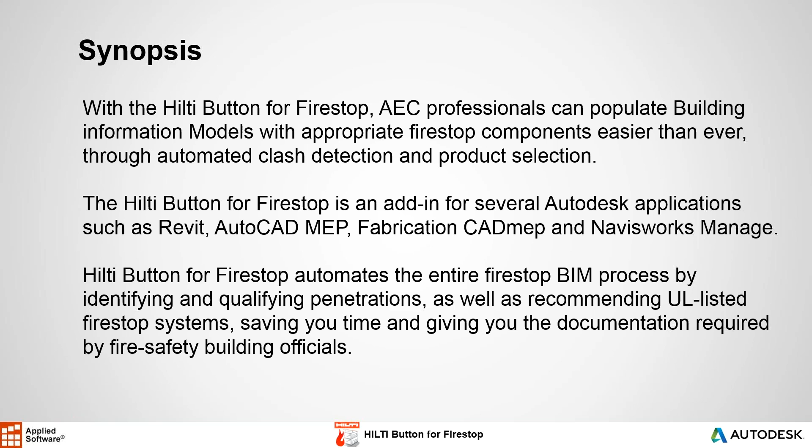The HILTI Button for Firestop automates the entire Firestop BIM process by identifying and qualifying penetrations, as well as recommending UL-listed Firestop systems, saving you time and giving you the documentation required by fire safety building officials.

So let's take a look at HILTI as a corporation. HILTI has been around for a long time, since World War II, and as you probably know, HILTI is a company that makes hardware solutions, drills, and what have you. But you probably didn't know that HILTI made Firestop products and also Firestop software for these products.

Before we actually talk about the software applications and how it works, let's make sure we understand the three strategies for fire protection in buildings. There are three primary strategies used to save lives and mitigate damages when a fire occurs: containment, suppression, and detection. With containment, we restrict the movement of smoke and toxic gases and help contain the smoke in the room of origin. With suppression, such as sprinklers, we help extinguish fires until the first responders arrive.

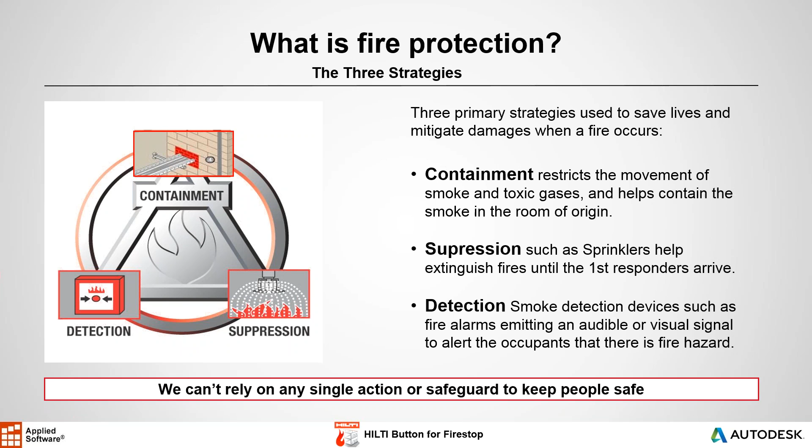With detection, smoke detection devices such as fire alarms emit an audible or visual signal to alert the occupants that there is a fire hazard. So we can't rely on a single action or safeguard to keep people safe. Obviously, containment, which is the first strategy, is better than all the others. Why? Well, Firestop is required by building fire codes and must be included in the design documents and specs. It's kind of a preemptive way to solve the problem.

Firestop is enforced by authorities having jurisdiction, and most field problems can be avoided by proactively including Firestop systems in the design process. So we want to use this as a preemptive way to save lives, assets, time, and money. Since Firestop saves lives and assets, it's a key component in the building value chain.

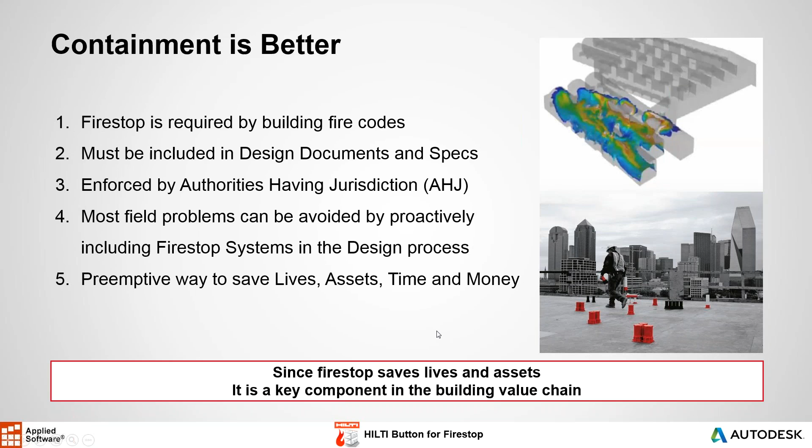So the typical Firestop activities in the field are improvised field discussions. Cast-in devices are used at best, inaccurate estimation process, and requires a manufacturer representative for product selection. So people simply call a HILTI representative or someone else to help them with the process. It's an afterthought, it's not organized, and I think we can do better than that.

So the implications of these activities is that you're spending too much time on details, modeling, or selecting product approvals. Of course, that means that you're wasting time, which is very valuable. And decision making in the field is a time-consuming process. Inaccurate bids result in change orders, inaccurate purchase orders, and there's a high possibility of rework required by the fire marshal.

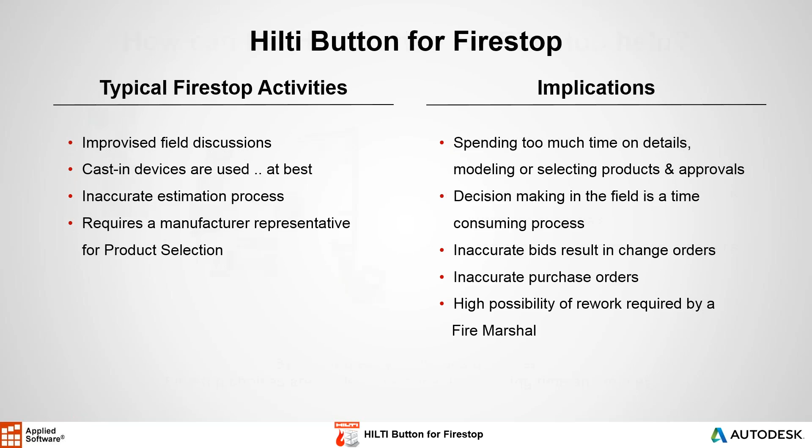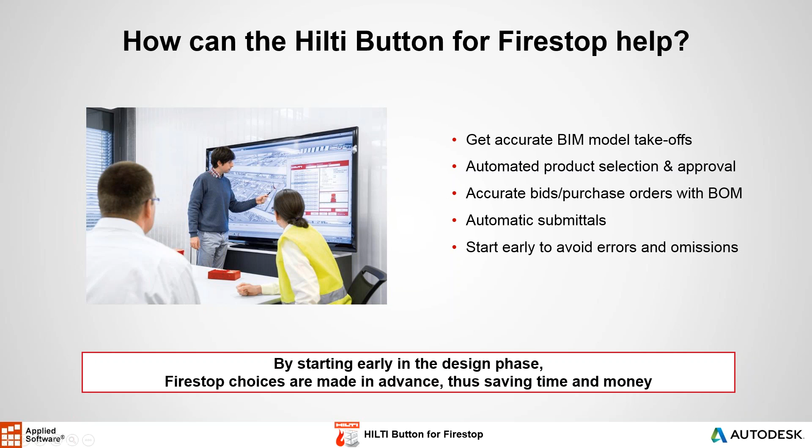So the HILTI Button for Firestop can help. First, by getting accurate BIM model takeoffs, automated product selection and approval, accurate bids and purchase orders with bill of materials, automatic submittals, and start early to avoid errors and omissions. So by starting early in the design phase, Firestop choices are made in advance, thus saving time and money.

Alright, so now we get to the actual application, which is the HILTI Button for Firestop. It's a five-step process. First, identifying and qualifying penetrations in the BIM authoring tool. Step 2, exporting to Navisworks Manage. Step 3, running the clash detection. Step 4, defining the UL systems and products. Step 5 is populating the 3D model with the Firestop BIM components.

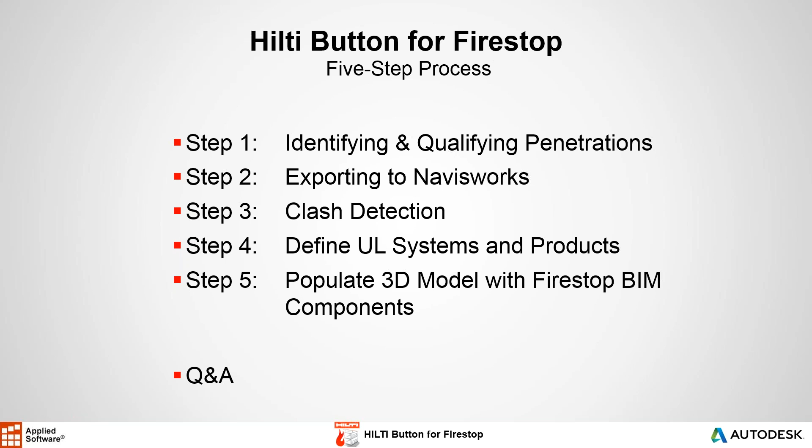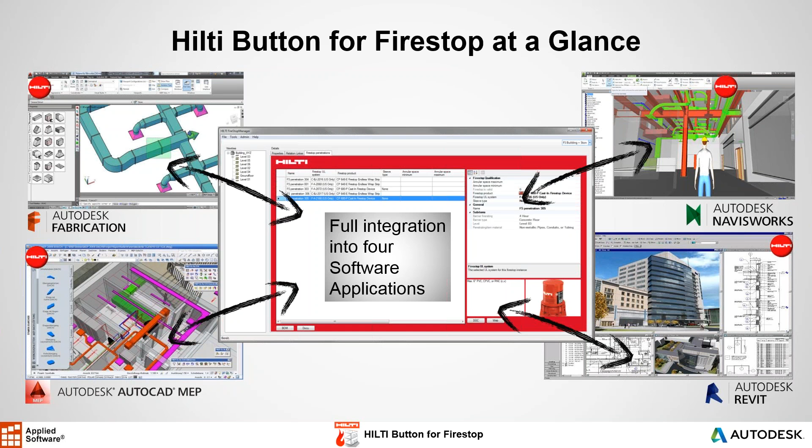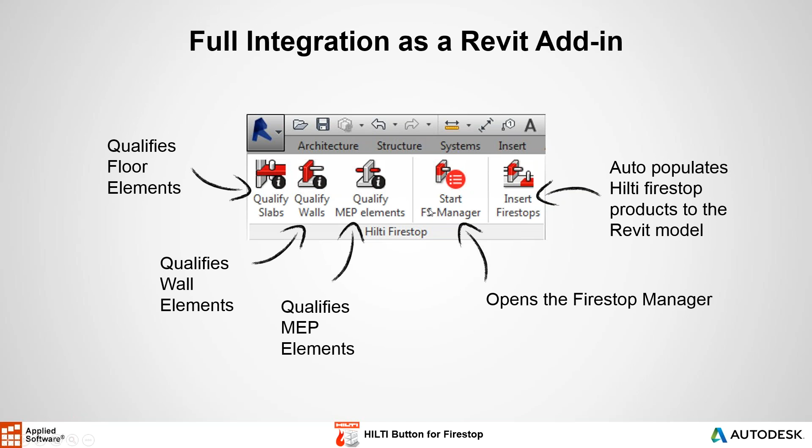At a glance, the HILTI Button for Firestop is involved with 4 software applications, namely Revit, Navisworks Manage, Autodesk Fab MEP, and AutoCAD MEP. So in the application itself, this is in Revit. The add-in is basically in the add-in menu of Revit. It has 5 components in it: qualify slab, qualify walls, MEP elements, start the Firestop Manager, and insert the Firestop. So you're going to see something very similar to that in the AutoCAD platform of products. Same thing, you're going to qualify the Fab MEP, the MEP, and then the rest of the products as well.

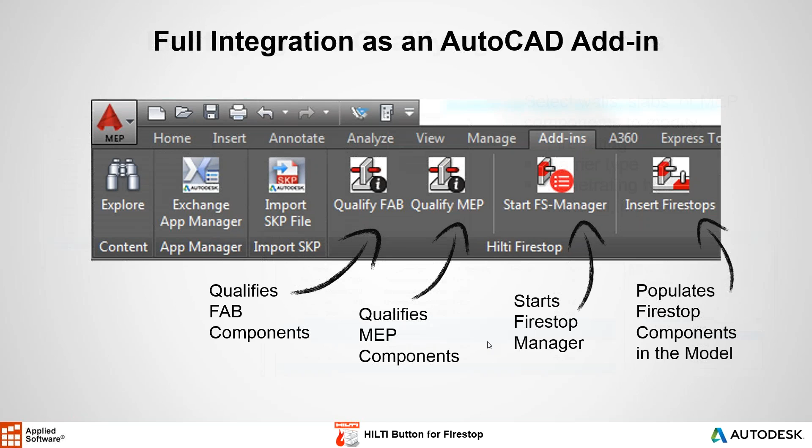So after we qualify, then we move on to make sure that specific components such as walls, slabs, or MEP components have the proper fire rating, the barrier type, penetrating material, and they actually have a material assigned with the insulation, if any. Of course, the fire rating can be 1 hour, 2 hour, 3 hour, and 4 hour, depending on the building itself.

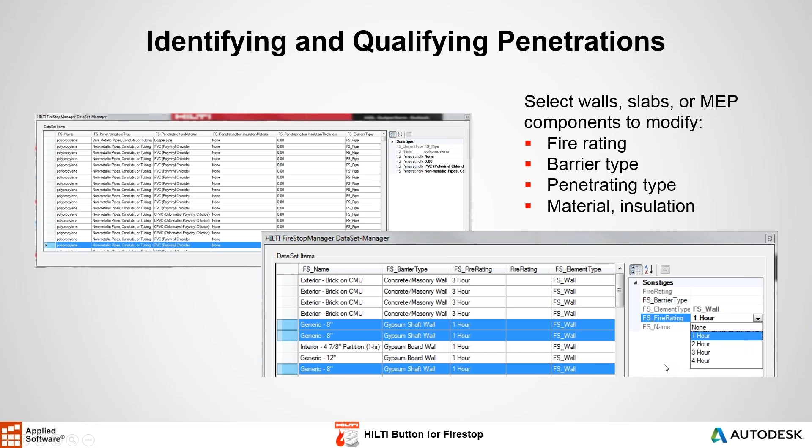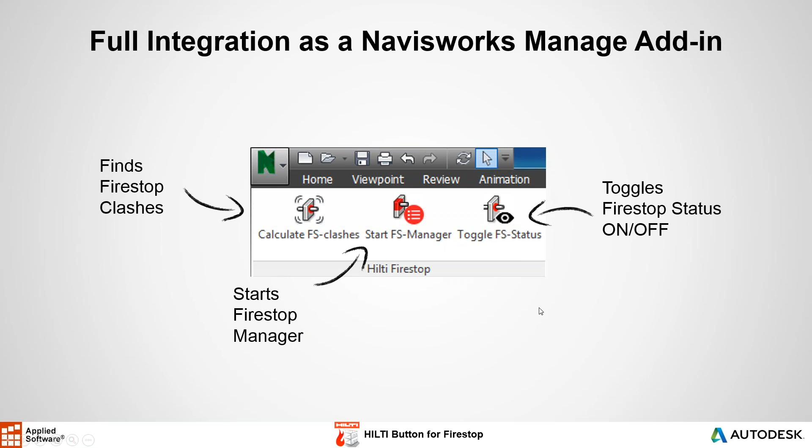In Navisworks, we basically find the Firestop clashes, start the Firestop manager, and toggle the Firestop status on or off. What you are used to in Navisworks in terms of running clash detection, this happens automatically using the Firestop manager. You're not actually going to be creating selection sets or search sets in Navisworks. This is an automated process, so it's completely free of manual intervention. Once you have qualified the elements in the BIM authoring tool, you take it into Navisworks, you run the clashes, and you get your clash results in Navisworks.

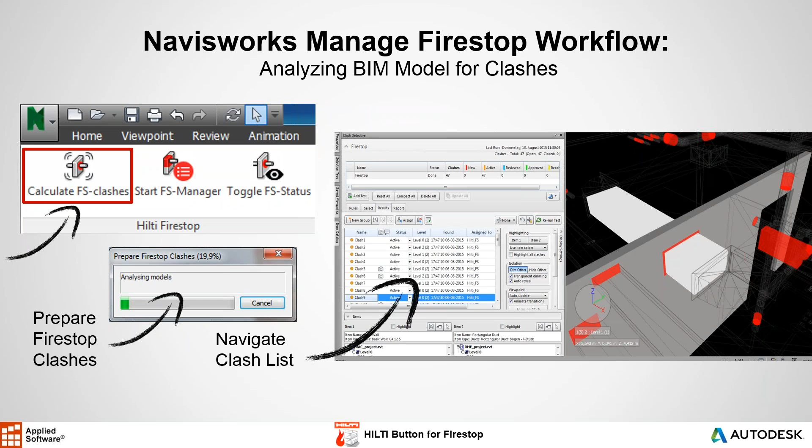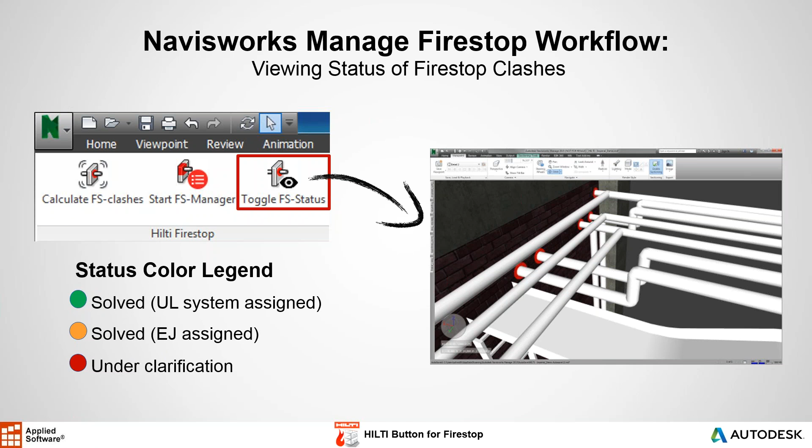The status of the Firestop clashes initially is red, which means it's under clarification. When it's solved, it becomes green, which means a UL system has been assigned to that penetration. If there is a question and you need some professional help with that, then a yellow color is assigned to that penetration.

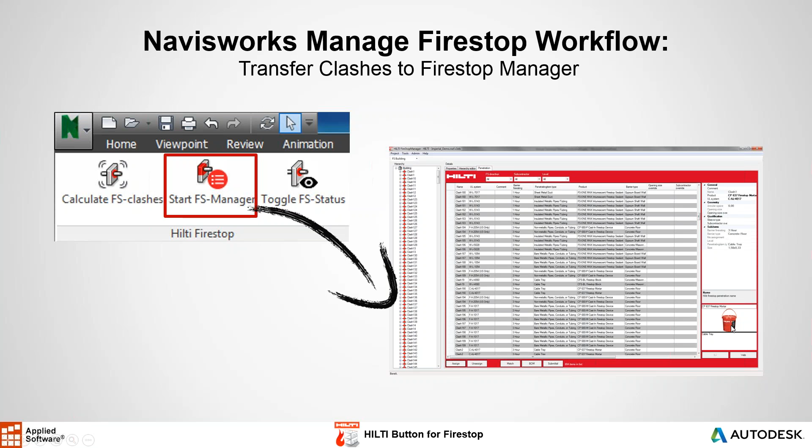So the next step would be to transfer the clashes to the Firestop manager. The Firestop manager opens up for HILTI and lists all the clashes hierarchically, and then you can simply assign those clashes, and you can see the preview of what the product looks like on the bottom right.

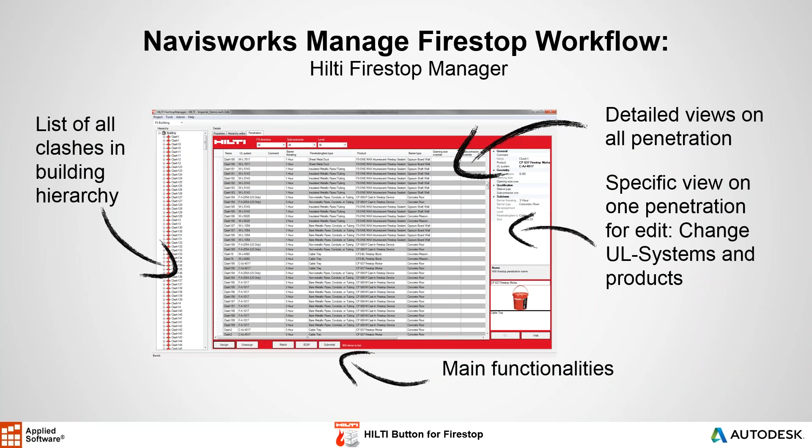Here, this slide shows the different functionalities of the Firestop manager. So at the bottom of the Firestop manager, you have 5 buttons. These are assign, unassign, match, bill of materials, and submittal. The first button, you're assigning UL systems and Firestop products to all the penetrations. The second button, you can unassign what you just assigned in case you need to make some changes. Number 3 is to change the one penetration or match similar penetrations to that specific penetration.

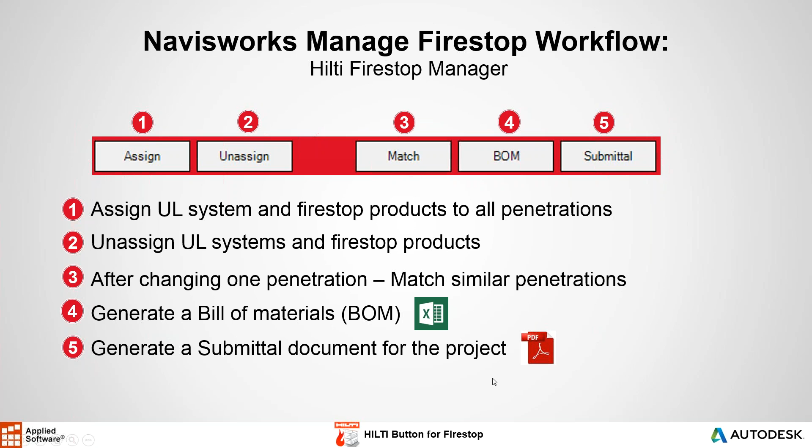Number 4 is you can generate a bill of materials, and then you can export that to Microsoft Excel. The most important part of this, of course, is to get to the submittal document, and this is generated as a PDF automatically using the Firestop button.

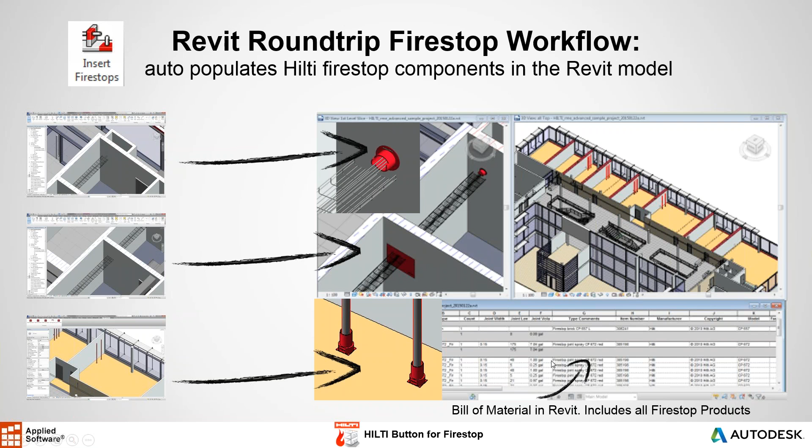So in order for this to work in the best way possible, we want this to be a complete circle. We want to go back to the BIM authoring tool and populate the Firestop components in the BIM authoring tool, which is in this case Revit. These are actual Revit families and can be listed in your Revit schedule. So let's move on now to a live demonstration.

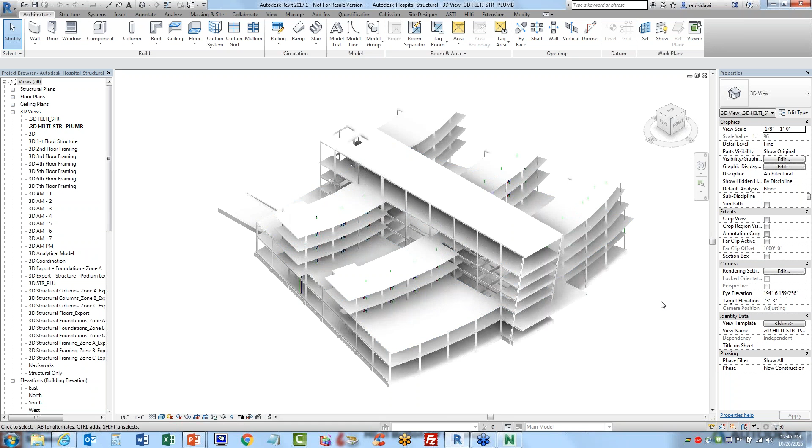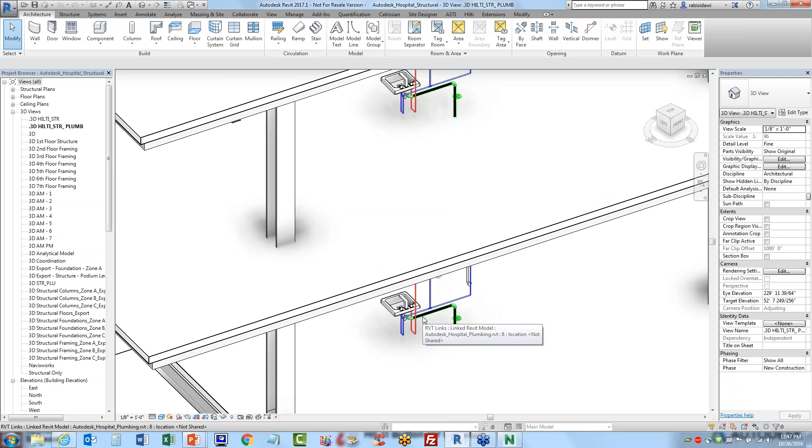I'm going to switch to Autodesk Revit. I have here a model for a hospital that I prepared in advance for you. This hospital model shows the structural framing, slabs, and also the linked MEP model showing the plumbing, piping, pipe fittings, and pipe accessories, as well as the plumbing fixtures.

It is best practice to isolate the structural model from the rest of the components, because the more components you have on the screen, the more time it will take. So we're going to select all the structural components, and we're going to use the HILTI button for Firestop menu to qualify the slabs.

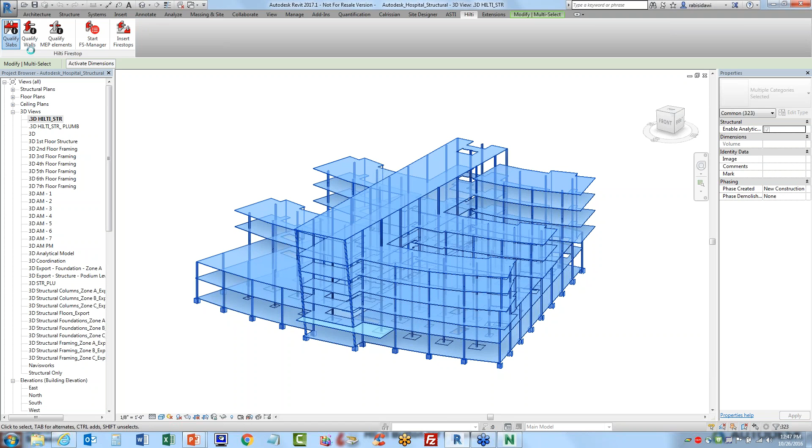Okay, so the HILTI button is going to find all these slabs for us, all the 6-inch slabs, 3-inch slabs, and other ones as well. And then it will give us the opportunity to come over here and check, make sure that we have the proper fire rating for this slab.

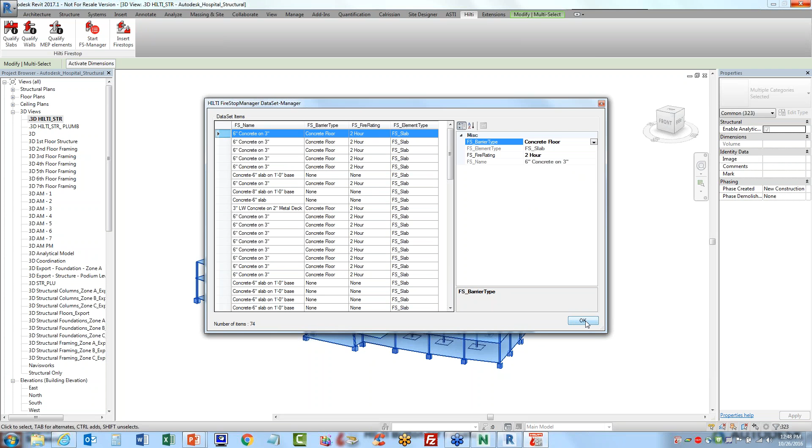And then, as I said, you can do this as none, or 1 hour, 2 hour, 3 hour, 4 hour. And you can come over here also on the barrier type, and change the barrier type to be either concrete floor, ceiling assembly, hollow core floor, and wood floor with ceiling assembly. Once this is done, then we can simply click OK to save the changes.

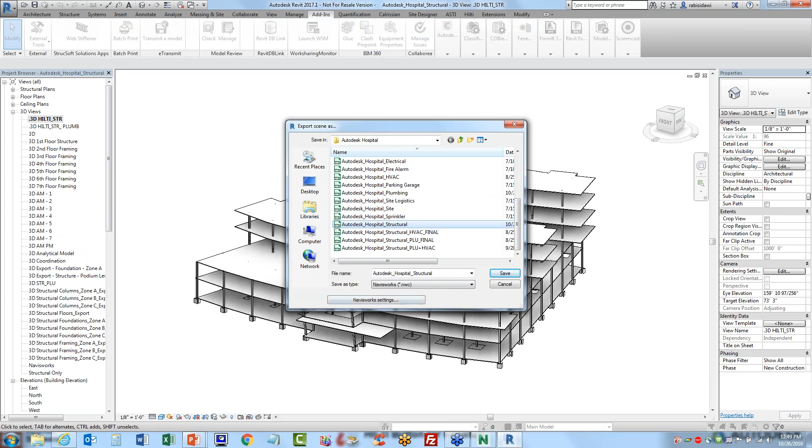All right, next we would export this into Navisworks, and I'm going to simply pretend that I'm doing that right now because I've already done that. So I'm going to select the file name and go to Navisworks settings and check the Navisworks settings before I export to Navisworks NWC file. First, we want to convert element IDs. We want to convert element parameters, element properties, use the project internal coordinates, and export current view.

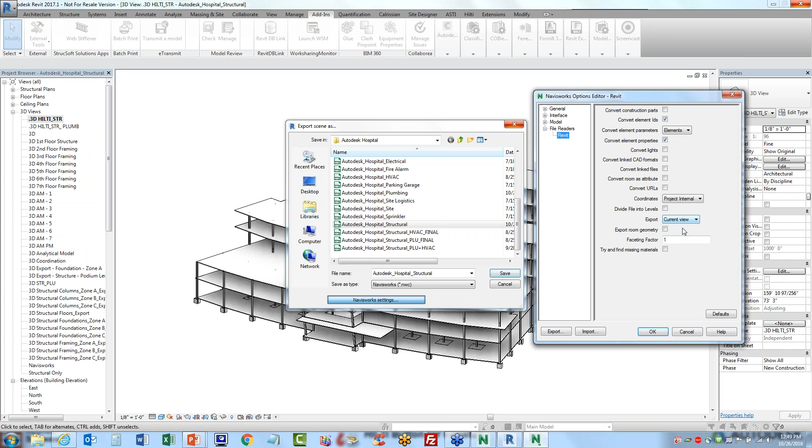So this current view right now is a structural file. This is an appropriate file to send out to Navisworks. Please disable anything else that's not relevant to this process. All we care about right now are the IDs, the parameters, the properties, the coordinates and the current view. All right, so we'll go ahead and save that as NWC file, and then move on to another model. So you kind of have to do each model separately.

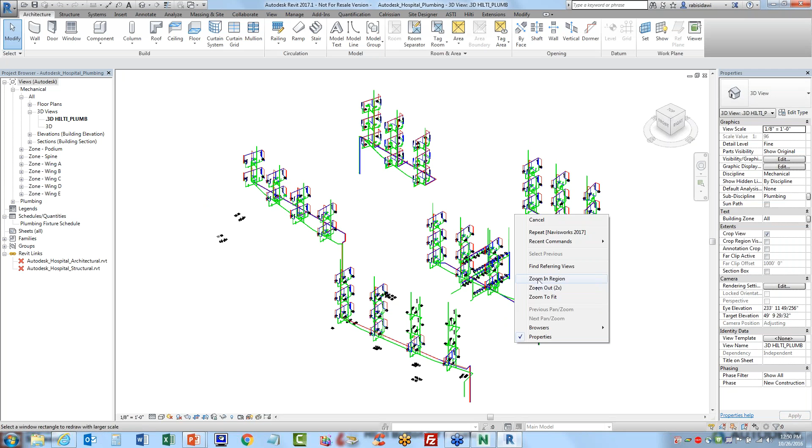Typically, you would have a model for plumbing, one for HVAC, one for architectural, partitions, and structural. So this is where we're going to isolate. Let me zoom in to show you what's going on. We're going to isolate these plumbing fixtures and pipes and fittings from the rest of the model, and we can probably turn off the fixtures as well. The entire model, and then proceed to qualify MEP elements as well.

Since I've done that already, I'm not going to repeat that process. It is very similar. You go through the process of selecting the... Actually, you know what? Let me actually do this, because with MEP it is a little bit different. I want to show you how the HILTI Button Firestop is able to detect the materials and the insulation around the pipes.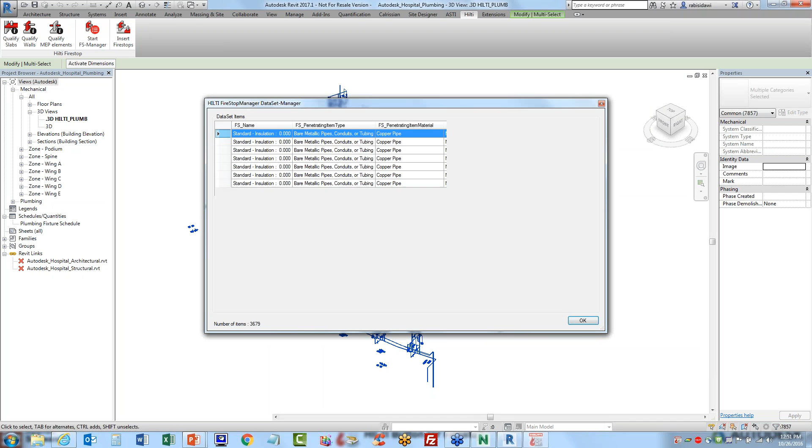This may take a couple minutes. So the process is fast, and this is a substantial size building. So if you have a bigger building, obviously it's going to take a little bit longer. So here we have some bare metallic pipes, conduits or tubing, and we can just come here and assign whether these pipes are bare metallic, insulated metallic, non-metallic, and so on and so forth.

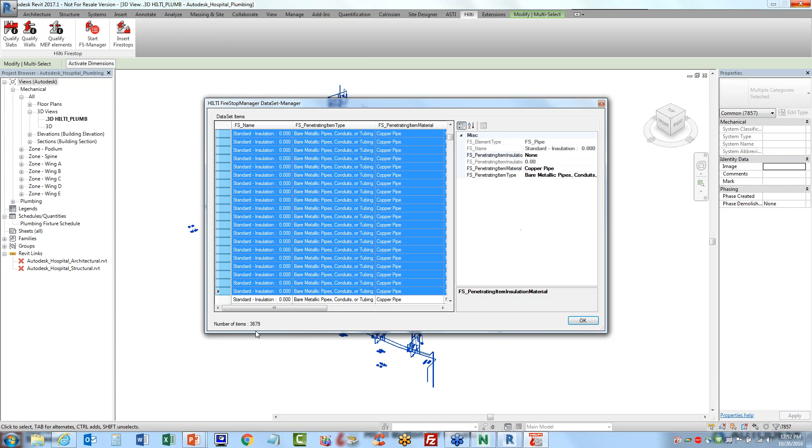You can also specify the insulation, whether it's a duct wrap, fiberglass, mineral fiber, or mineral wool batt. So you could look down this list. This is a very long list, obviously. You can simply look down this list and select elements with the same type, and using the Shift key, Shift click, you can select all of them at the same time. So it's not a one-by-one kind of thing. There's 3,600 pipes right now, and we can assign the materials and insulation to that.

So this process has already been done, so I'm going to skip that, and don't forget to go to the add-ins for Revit and export this view to Navisworks. So the view name right now ends with the word plumbing. This one right here.

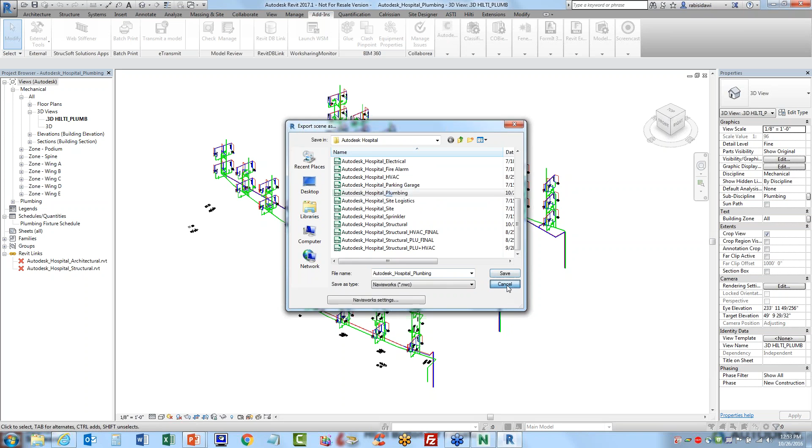Okay, so now we're going to switch to Navisworks. In Navisworks, I'll do this from scratch. I will simply load in the menu for this purpose. I've saved the menu earlier. The menu should contain your Clash Detective in Navisworks and maybe comments to see any comments that can come back from the UL listed assemblies.

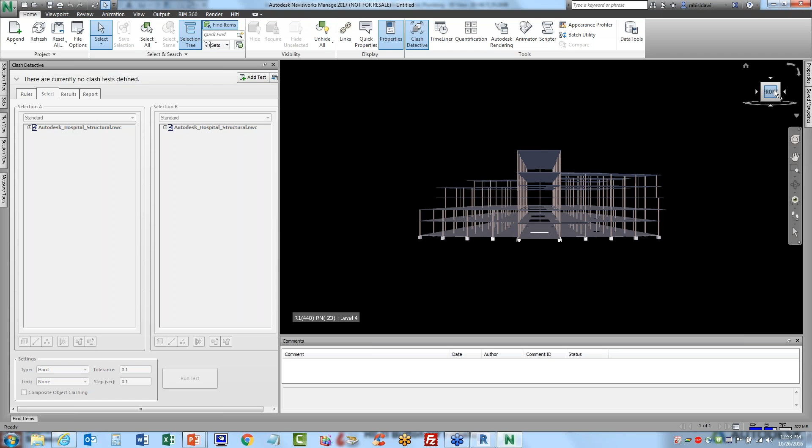We'll start by appending the NWC file. So we're going to go over here and select the NWC file, and we'll start with the structural model, append that into Navisworks. Here it is. And we will follow that with our MEP file, to be specific, the plumbing one.

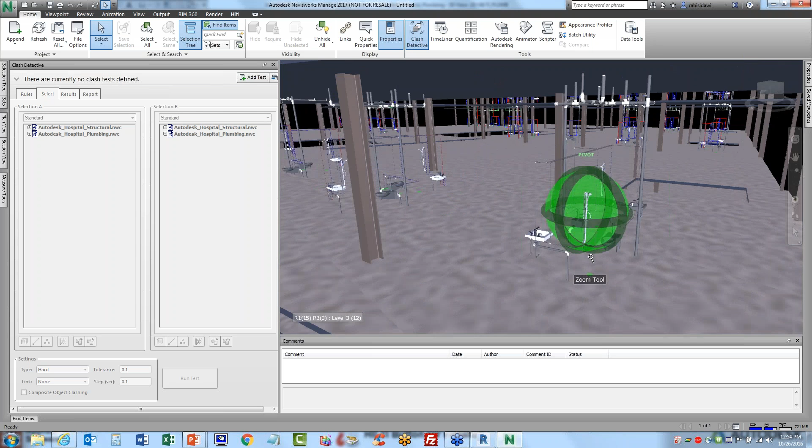And here it is. Here are MEP components inside of Navisworks with the structural model. So obviously, to do this manually would be a very tedious process. You don't want to just go around and navigate the model one by one to find where the penetrations are. That's just too tedious.

Next step is to go to the HILTI menu and calculate the Firestop clashes. And I'm going to receive an error message saying please save the file before continuing. Yep. So I'm going to go ahead and save. And I'll simply overwrite the one I had before, which is this one right here, structural plumbing. And this will be saved as an NWF file.

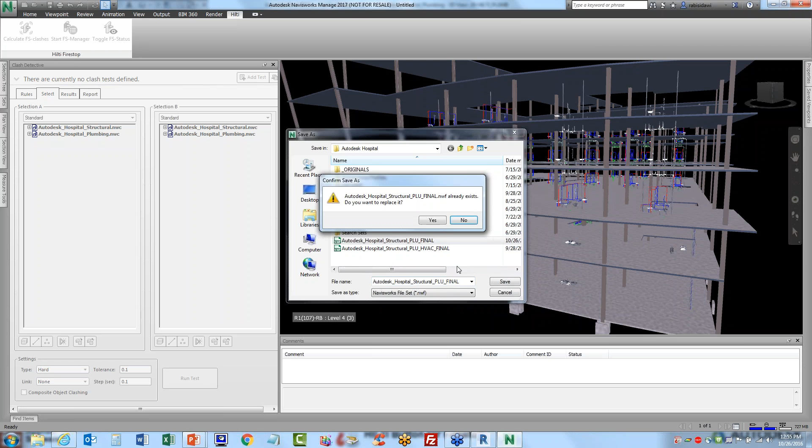Next, we will calculate the Firestop clashes. So we're doing this live. This is not a recording or a pre-prepared file. It's the same file we were looking at earlier, appended into Navisworks. So again, as I said, we don't need to do the search sets or selection sets. As long as you're using the same coordinates as Revit, then your model should align in Navisworks the same way they would align inside of Revit.

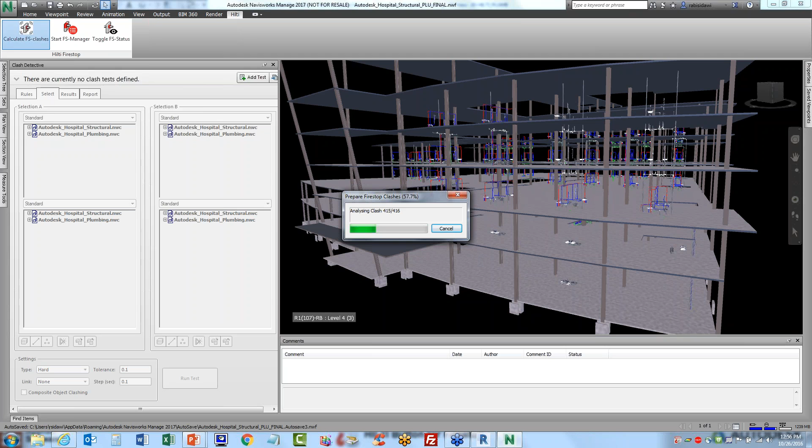So there's 416 clashes that were identified, and Navisworks now is trying to pull those together. And it will display the result within the next few seconds. It's pretty impressive if you think about how much work that is. The application is crunching numbers. I don't recommend that you do the Firestops for all of the disciplines at the same time. I think it will be too much work for the application, and you may get a lot of delays. So just try to break it down by discipline.

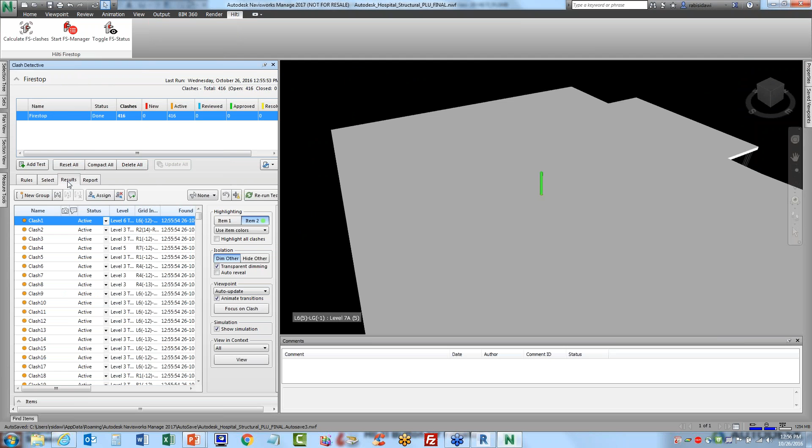Okay, here we go. So that wasn't too bad. We have 416 clashes for Firestop. Now we can move on to the results tab. And clash number 1 is on this left wing of the building. Here it is. I can just zoom in to see what the thing looks like. Notice that HILTI will put a red circle around the penetration, indicating that this is something that needs to be resolved.

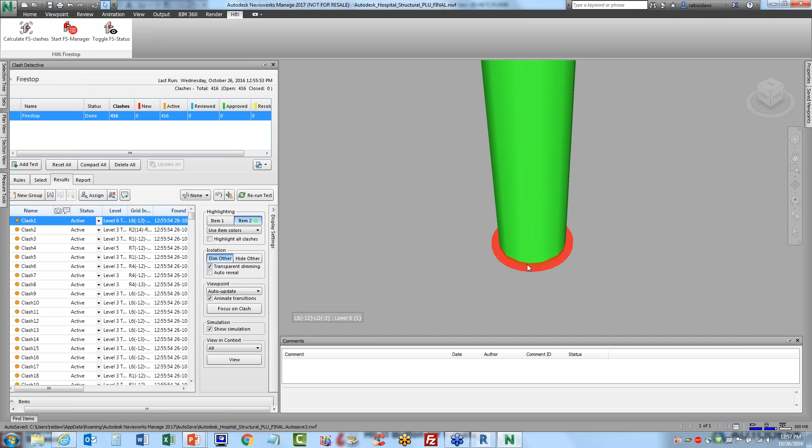Let's go to clash number 2. Clash number 2 is here with the green pipe on the floor. Clash number 3, the one next to it, and so on and so forth. Clash number 4. I'm making a point of showing you clashes 1 through 4 because we will be dealing with those in different ways when we go to the HILTI Firestop Manager. Note that there are no comments at the moment, but we will go ahead and save the file and start the Firestop Manager.

By starting the Firestop Manager, Navisworks is going to communicate with the HILTI application, and it's actually going to communicate with the HILTI website and server in Europe. HILTI is based in Liechtenstein. It's a tiny little country just south of Germany and north of Switzerland. And that's where the server is, and it's going to basically compare these penetrations to all the HILTI products with the appropriate UL listed solutions.

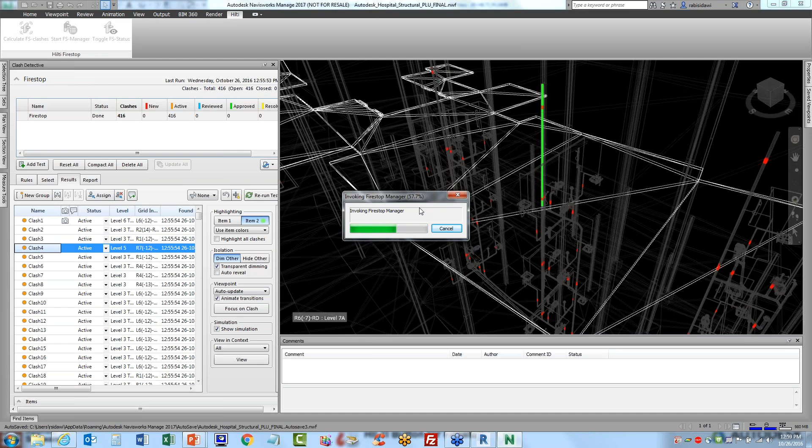Okay, so crunching numbers here. As soon as this is done, it's going to show the penetrations with these red markers, and it's going to launch the Firestop Manager. Here it comes. Just like what we showed earlier. So this is a very predictable process. It's also a very robust application. I'm pretty impressed with how robust it is. It always works.

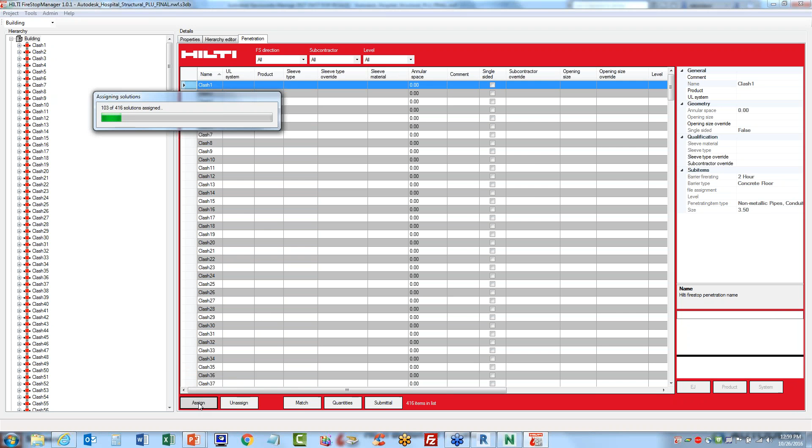So right now it's listed at clash number 300. I'm going to sort that by name. So now we start with clash number 1. If we select clash number 1, no solution is found at the moment until you assign the solution. So we're going to go ahead and assign the solutions. And okay, so now all the penetrations have been assigned a solution. Clash number 1 is a cast-in device, this model 680p, and it looks something like this.

Excuse me. So what I'm going to do, I'm just going to pretend that I don't like the solution. I'm going to come here, select the pull-down menu, and then I can pick a different type of solution from here. For example, I can pick this device right here, which is the F-A-2025. Now this happens to be a collar Firestop solution. Okay, but what's cool about it is that it is an acceptable solution for this penetration.

So again, I will do that for clash number 1, clash number 2. I'll pick the exact same solution. We end up with a Firestop collar. We go to clash number 3, and in this case, I may, for example, say, you know what?

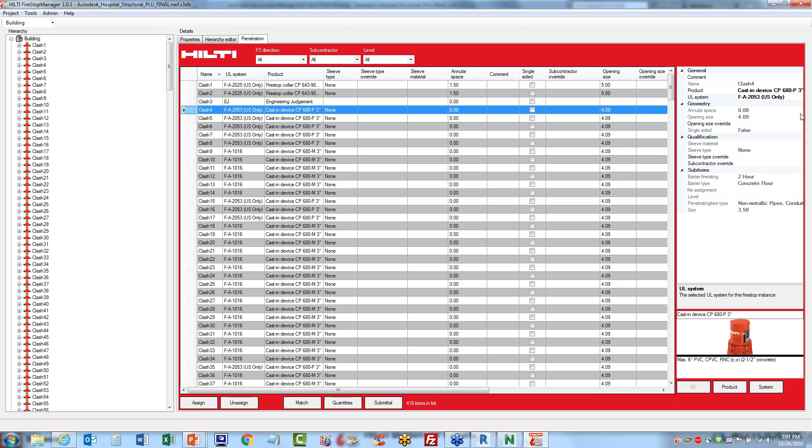I need someone to give me professional judgment, so I'm going to select EJ for that. I'll go to clash number 4, and I'll do the exact same thing. So clashes 1 and 2 have been replaced with a different solution, and clashes number 3 and 4 have been selected to be engineering judgment. We will go to quantities, and you can see here in the quantities that all the product types have been listed, and how many of them you have here. We have 2 that we just created as EJ.

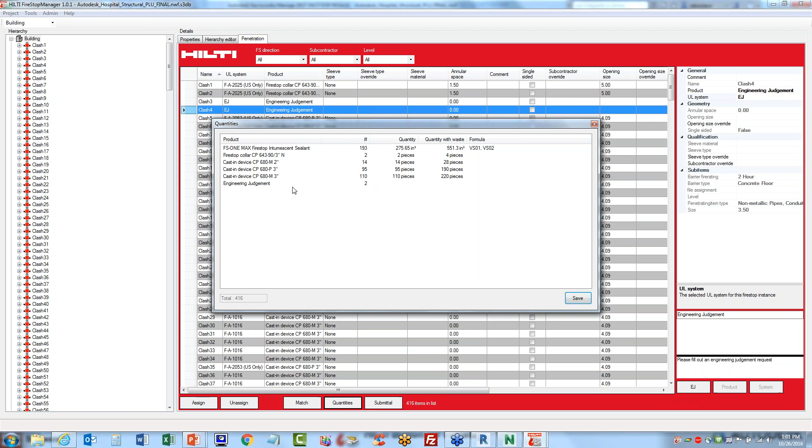We will save this as today's date, October 26th, and I've done this before, so I'm simply going to move forward, and then I'm going to create a submittal. Okay, so the submittal we'll create live. Again we'll pick this one and click save, and this will generate a live submittal based on all these different cut sheets and product specifications, in a PDF format.

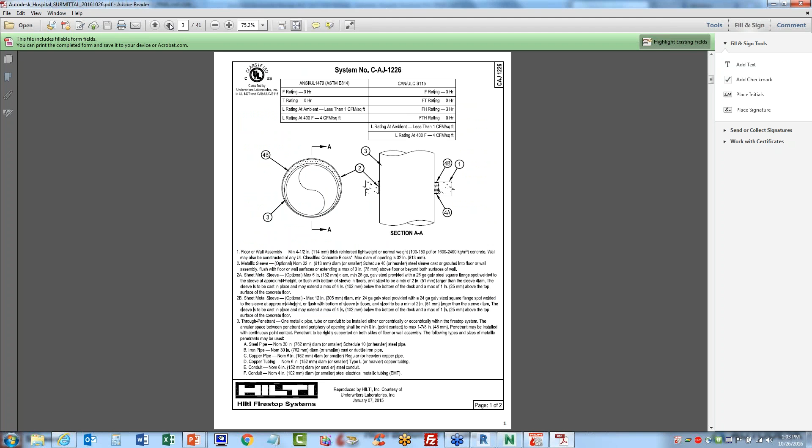So I can still edit the first page title of the PDF submittal. For example, I can say this is Autodesk Hospital, and give it a project name, etc. And then when I'm done, I can save this. So what does this thing look like? If you look at it page by page, it's got 41 pages, and it's got a lot of good things. It has a table of contents broken down by UL listings, Firestop collars, cast-in devices, and sealants. So if you specified UL listed devices in the past, you've probably seen this before.

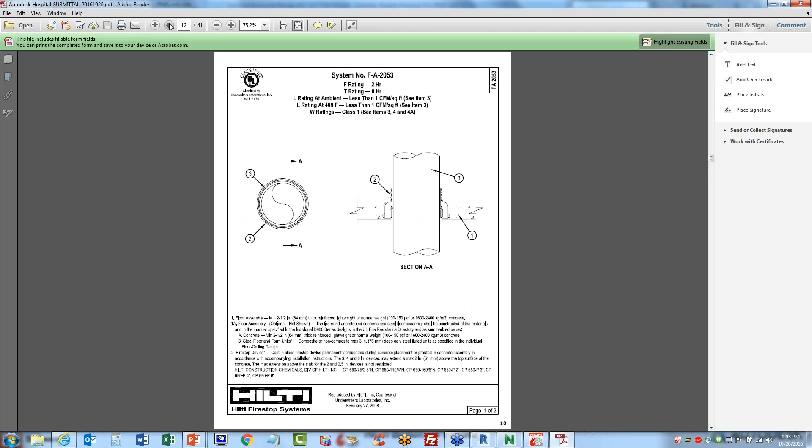So every Firestop solution that was identified is now listed here. We have the Firestop collars. We have a certificate of compliance signed by the Vice President. We have some safety data sheets. We have a to-whom-it-may-concern letter from the Safety Environmental Manager at HILTI, certifying that these products meet code requirements. We have the cast-in devices, and again, another certificate of compliance.

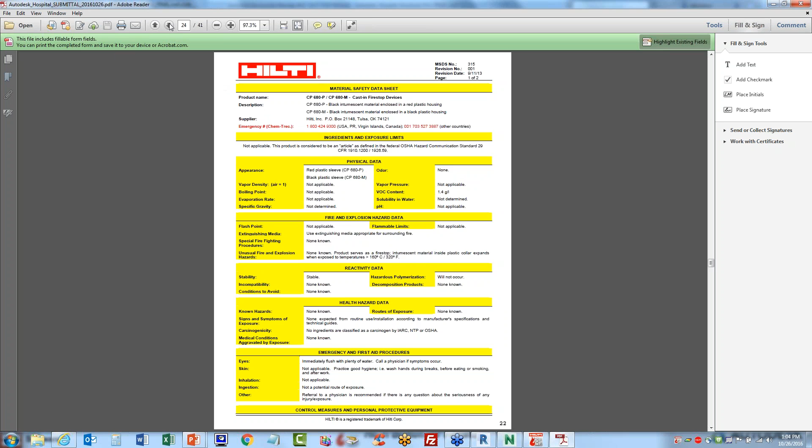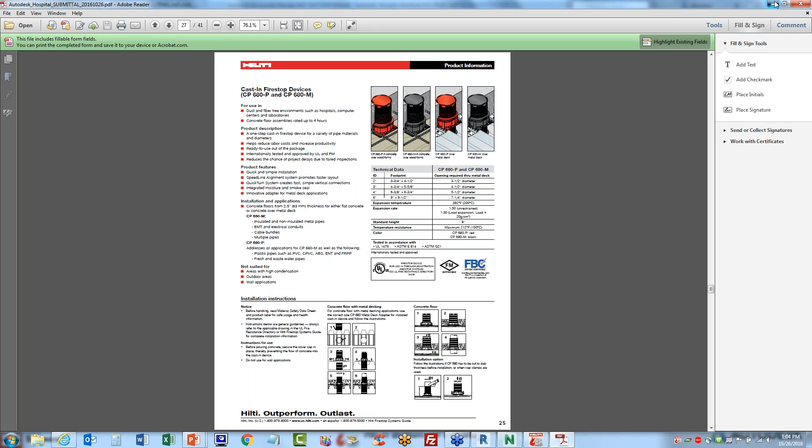So this would be an easy document for you to fill out the missing information for the project, and then simply give that to the Firestop Marshal. So I like it very much. I think this is very neat. All right, we're done with all these buttons down here. This also allows you to look at the product on the HILTI website, and also the cut sheets as well. So if we were to close this Firestop Manager,

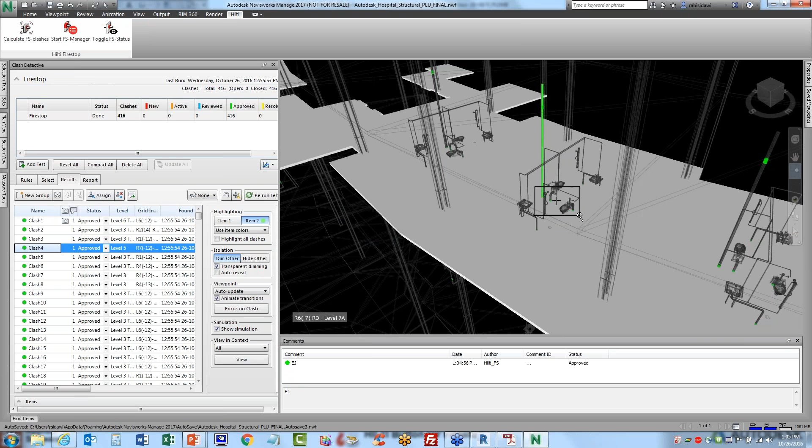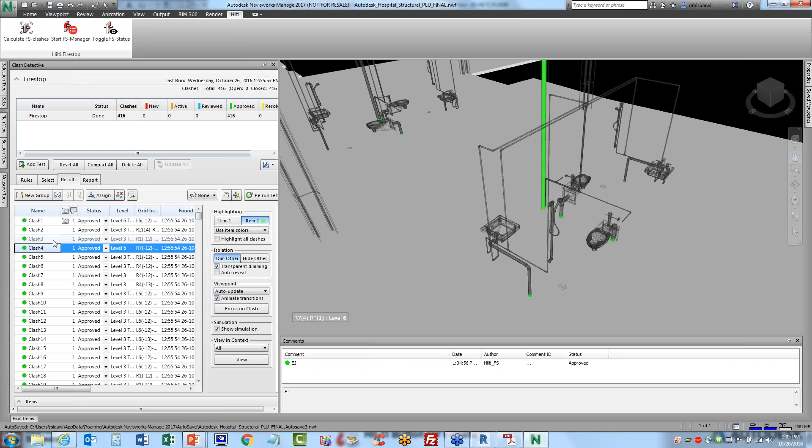HILTI is going to populate the Firestop penetrations with the appropriate solutions. So if you notice, the colors of these penetrations have changed from red to green, and for some reason I can't move any closer than that, but the one that was given an EJ is now yellow. This one right here. So under clash number 3 and clash number 4, we have a comment. It says EJ approved, but it needs more study.

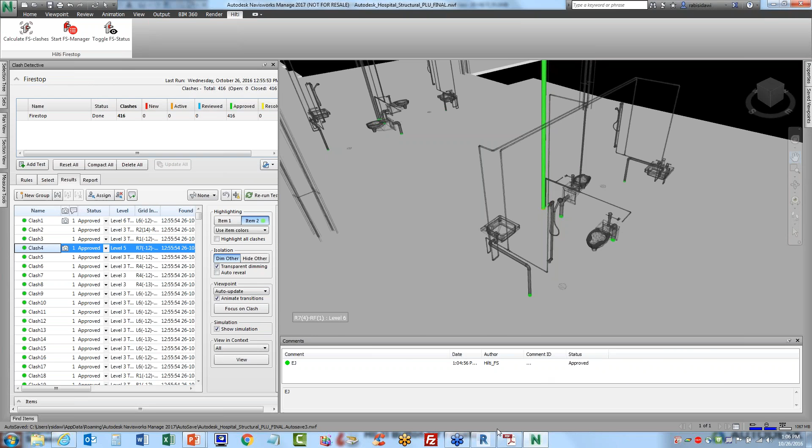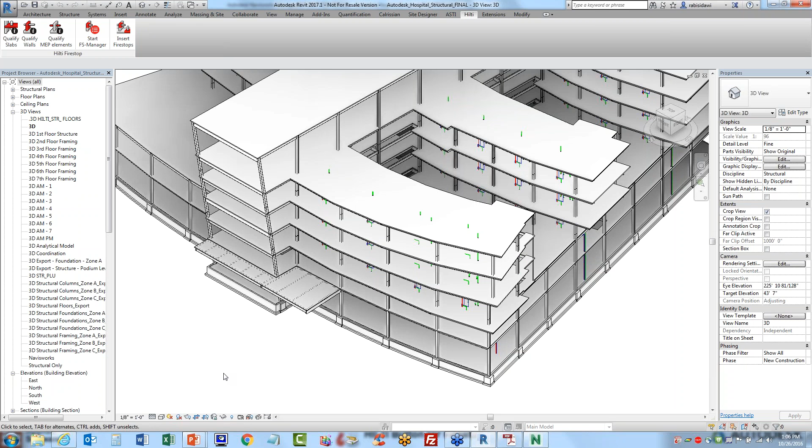We're going to save this information and then switch into Revit. In Revit, we will go ahead and open the structural model and see how we can populate the structural model with the Firestop solutions from the Firestop Manager. So the process goes like this. Basically, you go to the HILTI menu, and then you insert the Firestops. This process takes some time, so I kind of prepared that for you in advance.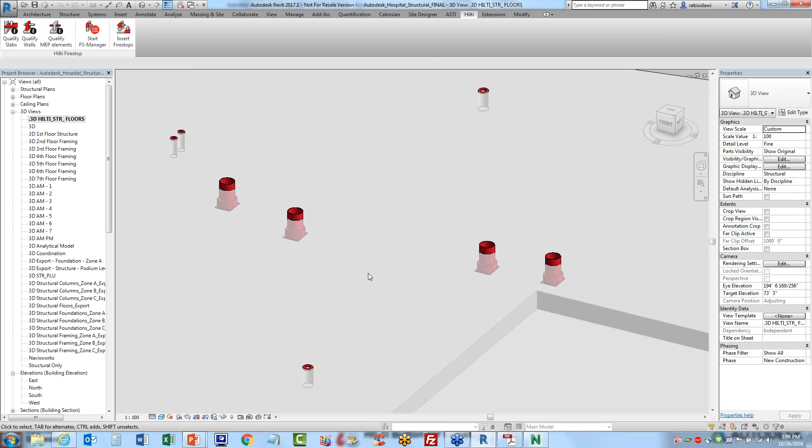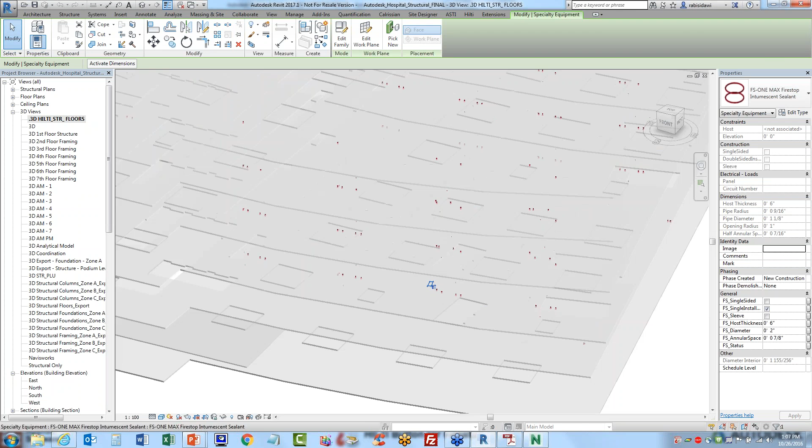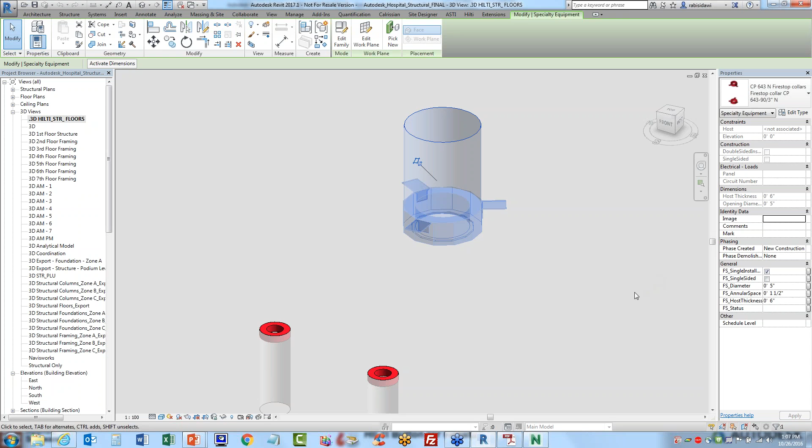And what you see here is I've isolated the floor slabs and the HILTI Firestop devices, and as you can see, if you were to select those, you will notice that these are Revit families, and they are of the type specialty equipment. So this one right here would be the sealant, and the others are the cast-in devices. Here we go. I was looking for that collar that we selected. This is it. This is clash number 2, I believe. So this right here is the collar, and you can see that it's a full-fledged Revit family with all the different properties.

So I have one more thing to show you before I turn it over to Amy. Hopefully, Amy is getting your questions right now as we speak.

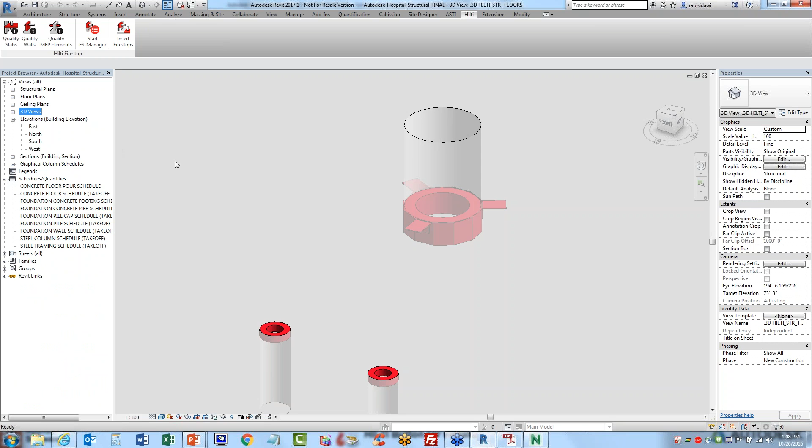So what I'm going to do is switch to schedules, and I'm looking here for a specialty equipment schedule. I can't find one, so I'll probably make one from scratch. Let's go ahead and do that. We'll go to the View menu, select the Schedule command in Revit, browse down to the specialty equipment category, and let's make sure we have the type. We have the... I think that'll be enough for now.

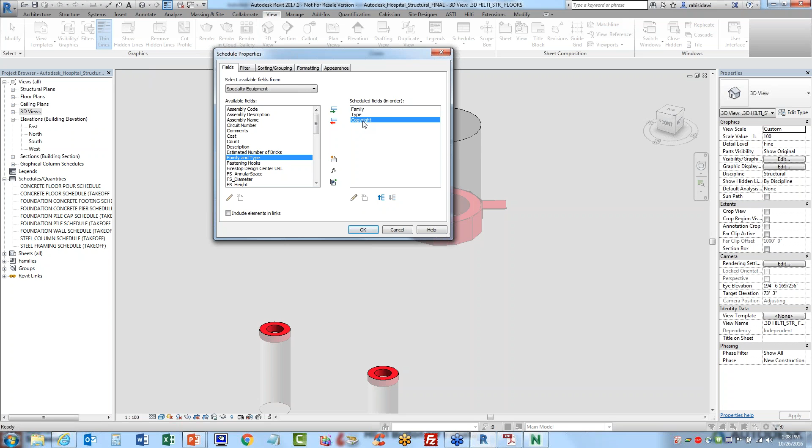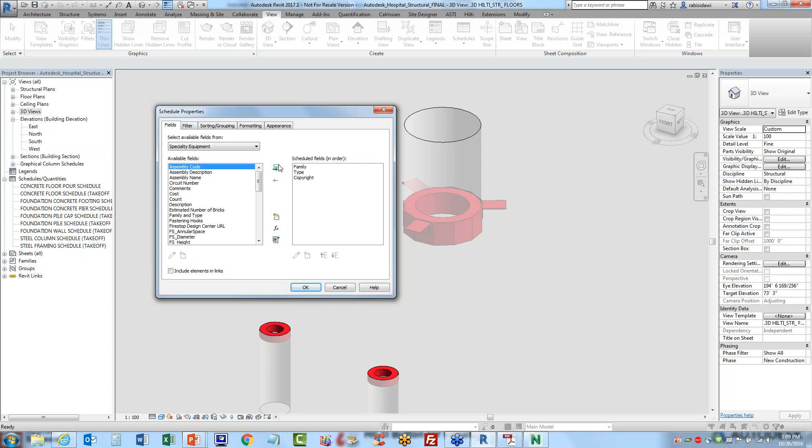We could also actually put the family. Let's put the family in there. So family, and then type, and then copyright. The copyright is a way for us to filter by specific value, because we don't want the specialty equipment of the project to get mixed up with the HILTI components. So we can go to the Filter tab and then filter by this particular value. You could also go to the Formatting tab and make this a hidden field also.

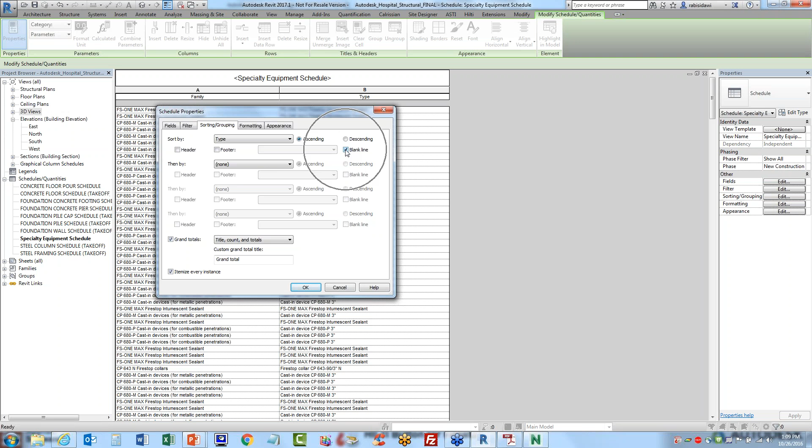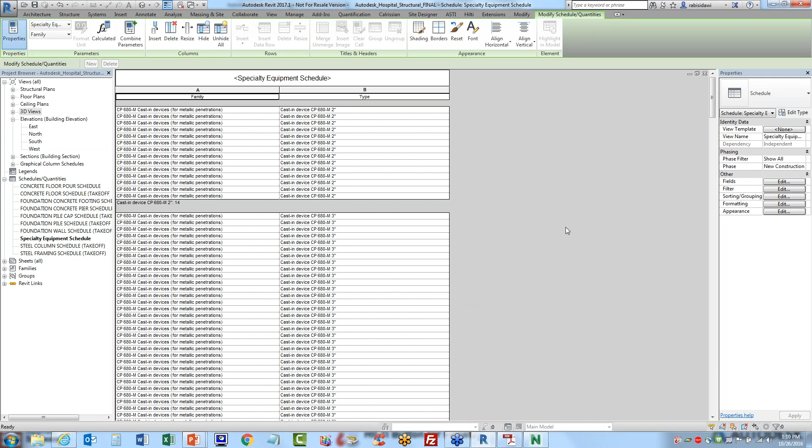As soon as we click OK, Revit is going to list all of the Firestop solutions over here, and there's about 400 of them or more. So obviously we can filter and sort the schedule a little bit better. We can go back to the properties, sort by type, do the grand totals, itemize every instance, put a blank line or a footer in between, and simply we have now all these devices listed by their type. It just makes it easy for us to figure out the subtotal for each type.

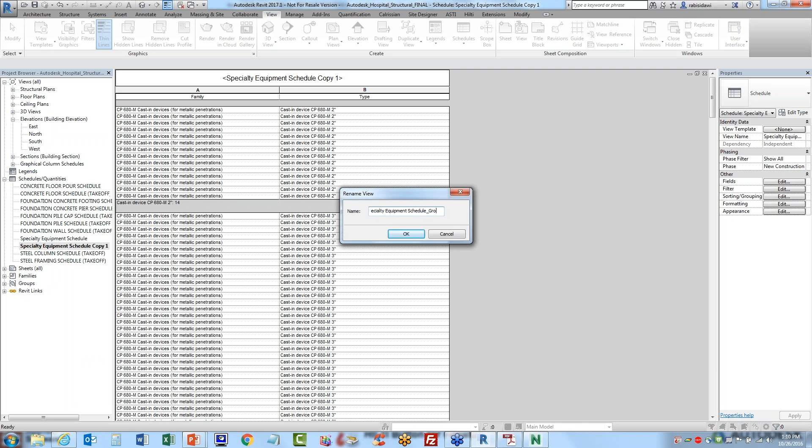And if you wanted to, you could come here and say, you know what, I want this to be duplicated, and I want to make this grouped or non-itemized. In the group schedule, we can simply go back to the properties and uncheck the box for itemize every instance. That's going to give us just high-level subtotals for each of those types. So hopefully this was pretty cool.

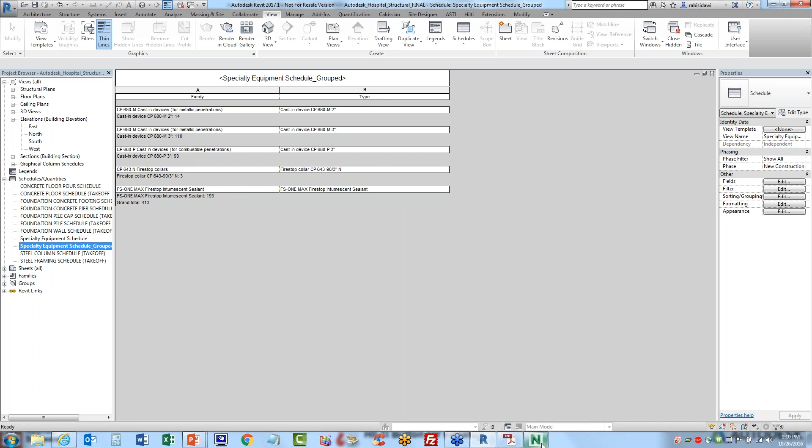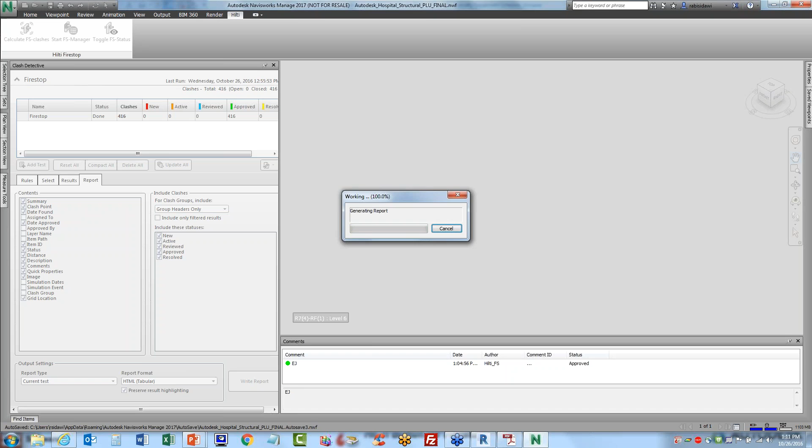I do want to also mention that if you go back to Navisworks, you could actually create a report in Navisworks. I recommend creating an HTML tabular report. Let's just go ahead and override this one. We'll give it today's date, 16/10/26. What that's going to do is create a thumbnail image of every clash and put that in an HTML tabular report. That would be very effective for providing that to your team, so they know they have a document and it shows which solution is being provided.

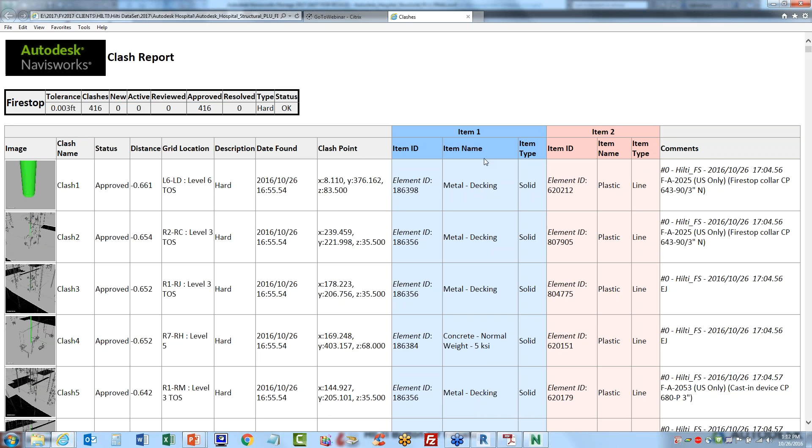Thank you very much. Thank you, Robbie. We have a couple of questions. What version of the software does HILTI work with? It does work with 2017 and 16. All right, and what is the cost of this program? Well, I think the best way to handle this is, you can contact your Applied Software representative, account manager, and they'll provide you with the cost information. You can also visit the HILTI website to download the application. Basically, HILTI.com is where you go and search for the HILTI button for Firestop.

All right, and what do you do if you forget something? Can I go back and make changes? Absolutely. Anytime in the process, you can go back and make changes, for example, to the qualifying of your slabs or your walls or your MEP components, and then run the qualification again, but you have to create those Navisworks files again one more time.

All right, and what do you do if no solution was found? Yeah, this is the process that I explained earlier regarding EJ. Basically, if the application cannot find a solution, it's maybe because the material is not defined or the penetration is kind of difficult at an angle. So you can assign it an EJ, and then a representative from HILTI will contact you to resolve the situation and give you more info on that.